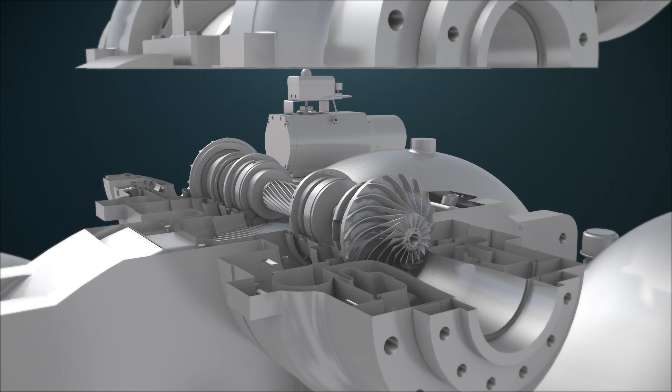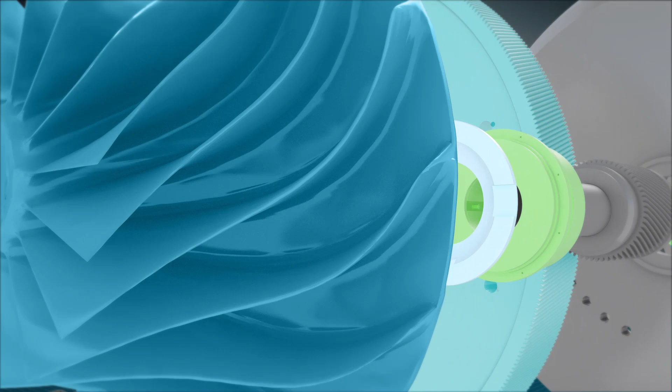By placing impellers on separate pinions, integrally geared compressors deliver multiple speed capability. Each compression stage runs at the optimum speed for high efficiency. The compressor's bull gear drives the main oil lube pump, providing adequate lubrication to the bearings and gears.

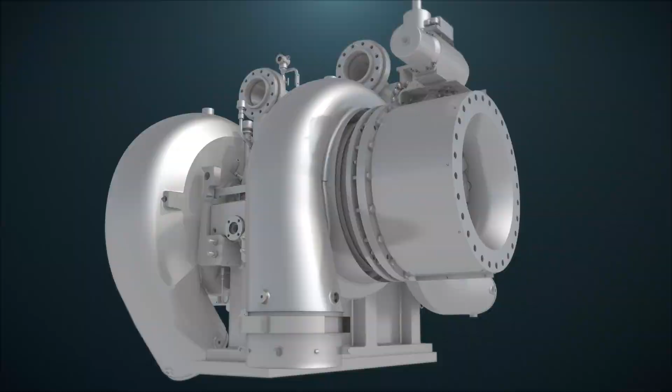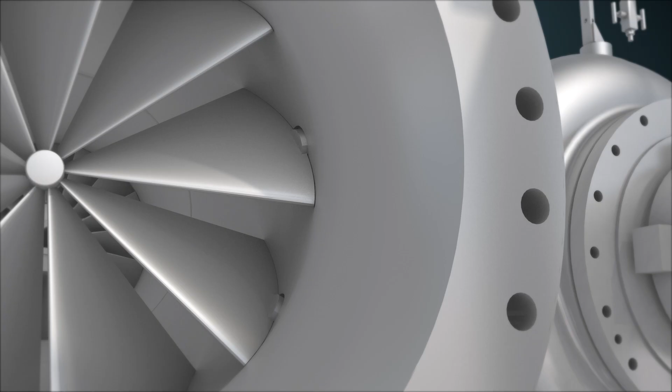The compression process begins with gas entering through adjustable inlet guide vanes, or IGVs. This technology is standard on most Atlas Copco gas and process compressors. The IGVs regulate the flow that is sent into the machine, providing accurate process control. With IGVs, compressor efficiency can be increased by up to 9% versus other inlet assemblies.

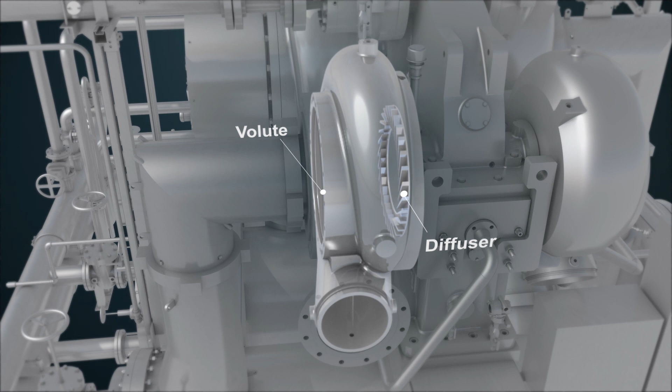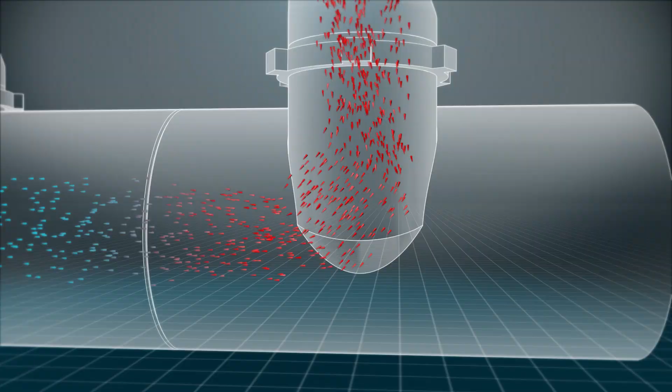Our impellers, available in open or closed configurations, impart kinetic energy to the gas. The kinetic energy is turned into pressure in the diffuser, and then the volute. This part of the process causes gas temperatures to rise along with the compression level. To improve compression efficiency, interstage cooling can be easily accommodated between any of the compressor stages.

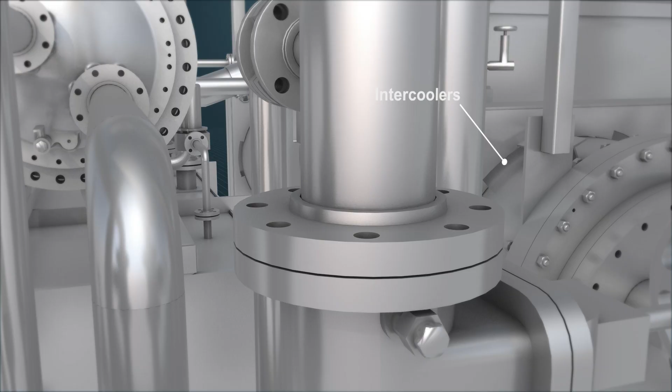Atlas Copco Gas and Process offers a range of intercoolers that are precisely matched to process requirements and meet all relevant international standards. In the configuration shown, water coolers are available in either water in the shell, gas in the tube, or gas in the shell, water in the tube designs.

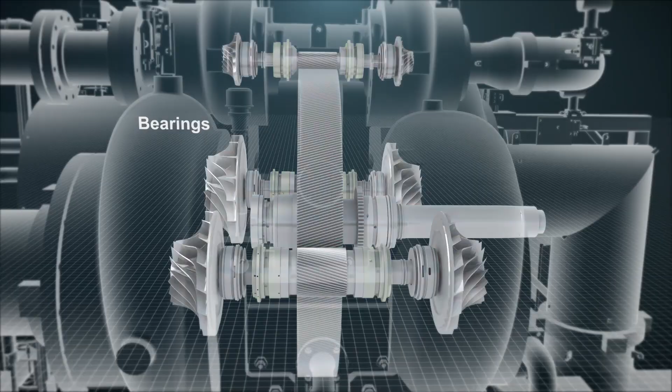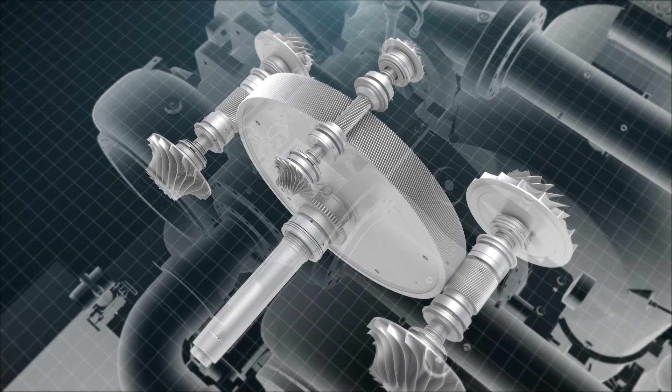Radial tilted pad bearings support the high-speed rotors, eliminating almost all vibration while providing superior stability and smooth rotation. Depending on the application, this can be a combination of radial and thrust bearings. The bull gear shaft rotates on multi-lobe sleeve bearings.

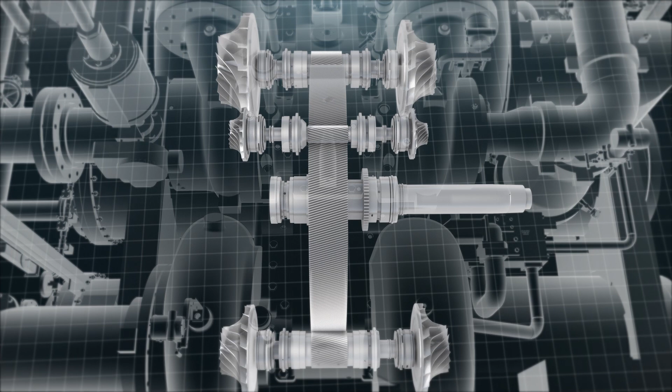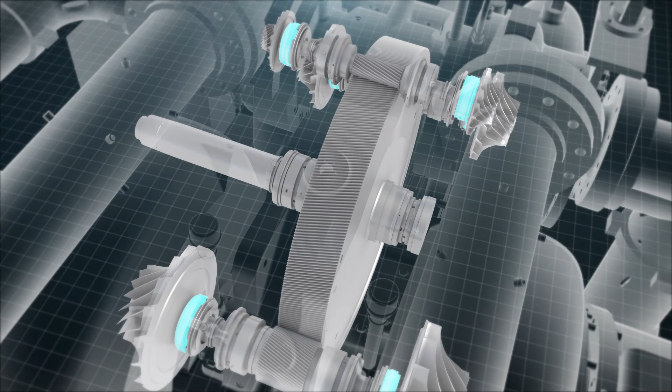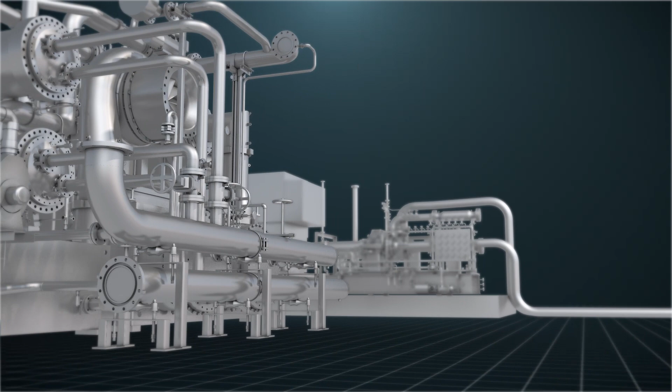Compressor sealing options may include dry gas seals, floating carbon ring seals, and labyrinth seals in various combinations and arrangements. Our range of integrally geared compressors is used in a variety of industries, and our compressors can be customized to specific process requirements. As the name suggests, all compressor stages of integrally geared compressors are mounted on a single gearbox.

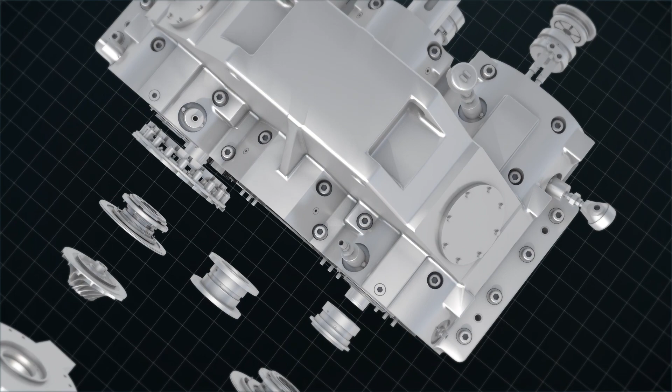Thanks to their rotor and aerodynamic design, along with intercooling capability, integrally geared compressors can be as much as 15% more efficient than other rotary compressors. To enhance performance, a number of other features are available, such as variable diffuser guide vanes or DGVs, which can be added to complement impeller aerodynamics.

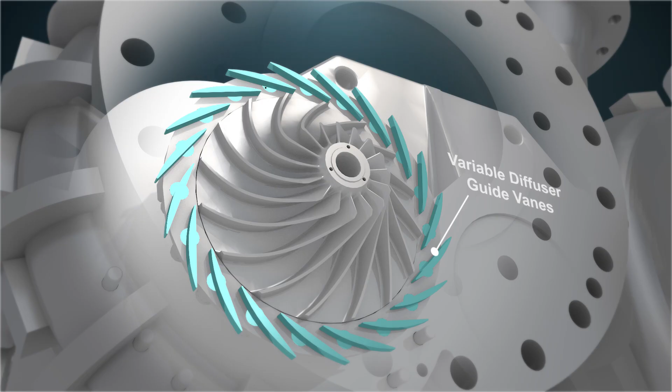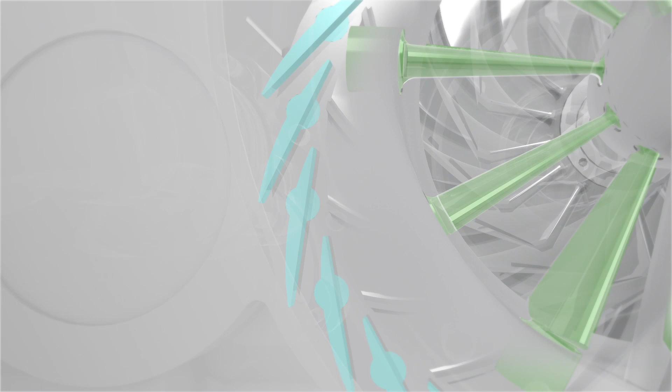Adjustable DGVs enable larger turndown, which ultimately results in wider process control without impairing efficiency. An ideal mix that is increasingly required by process engineers. Both variable inlet and diffuser guide vanes provide stable compressor operation over a wide range of conditions at a constant discharge pressure.

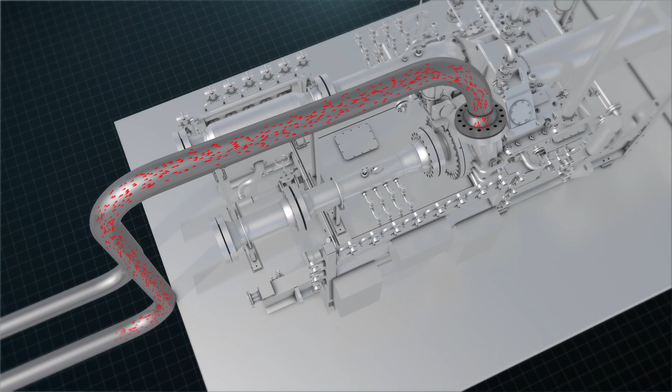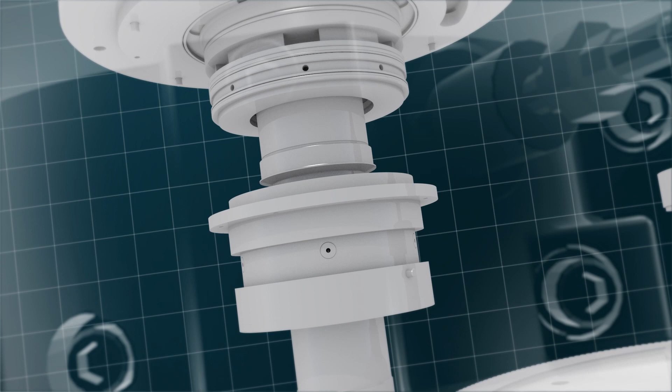To control gas temperatures during compression in situations where cooling water is not easily accessible, an air-cooled version of our compressors is available. For applications where process gas leakage is restricted, or when process gas needs to remain within the system, our integrally geared compressors can be built with dynamic dry gas seals. These seals can be supplied in single, double, or tandem arrangements depending on the application.

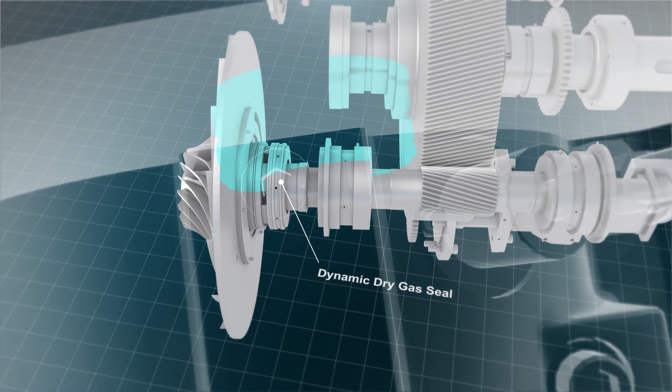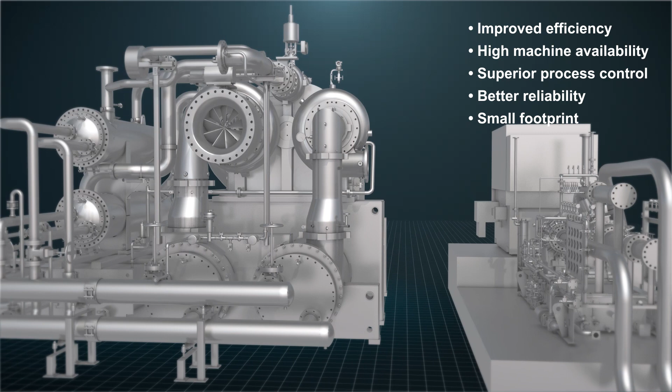In fact, Atlas Copco Gas and Process was the first compressor manufacturer to implement dry gas seals on integrally geared compressors. Superior efficiency, over 99% reliability and availability, packaged on a small, single-skid footprint. Atlas Copco Gas and Process integrally geared compressors give your process the extra edge in a variety of applications across many industries.